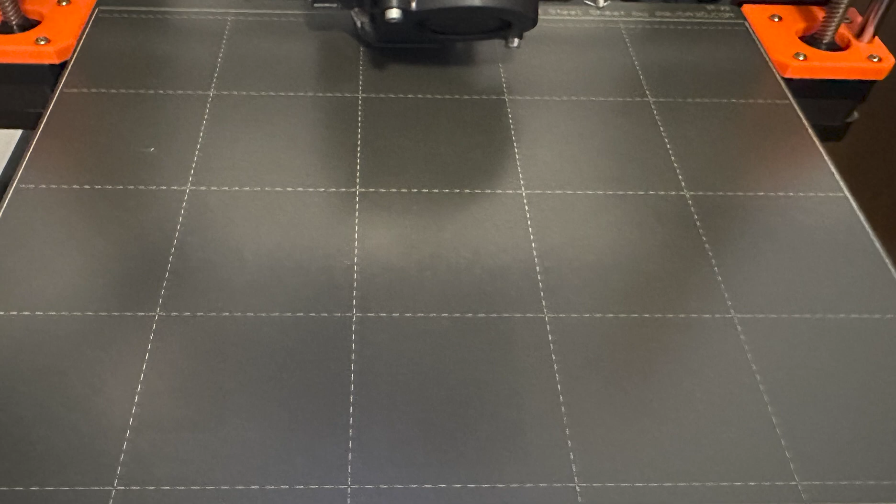Stop touching your print bed when you take prints off of it. Use a tool or something if you need to, but for right now, let's go wash that print bed. Use a little bit of warm water, dish soap, rubbing alcohol, anything like that. Get that print bed nice and clean, get those skin oils off of it.

After that, we need to make sure we're printing in the right temperatures. Let me show you how to do that. Here in Cura in the marketplace, right up here, if we come into the search bar and do a search for temp towers, you'll find this auto towers generator. Go ahead and click install.

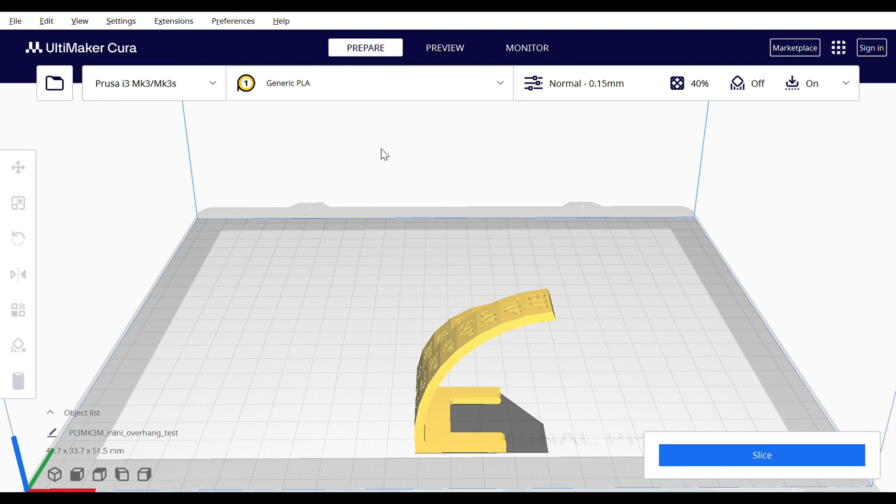Once you have that auto tower generator installed, you're going to want to click here on extensions, auto towers, and then come down to the filament you're using, ABA, ABS, PETG, PLA, whatever it is. I'm going to click on PLA right now.

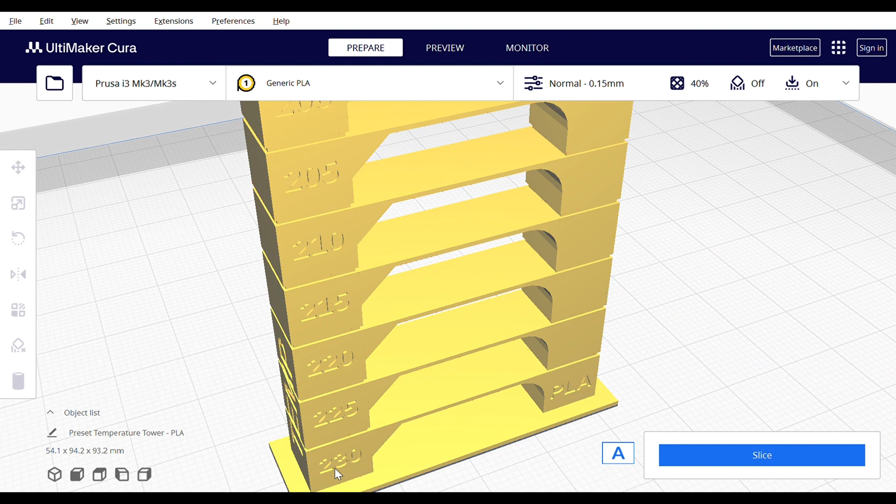It's going to add this tower in the background here to your print, which is programmed already to start at 230 degrees. It prints these recessed numbers. It prints an overhang, it prints an arch, a bridge, and then it'll lower it by 5 degrees, 225, 220, and it goes all the way up to like 180 or 185, something like that.

Your job after you print it without supports is to come in and look at each one and see which print's the best, which one has the least amount of spaghetti hanging off the bottom, where the overhangs are best, where the arches are best, where the numbers look the best.

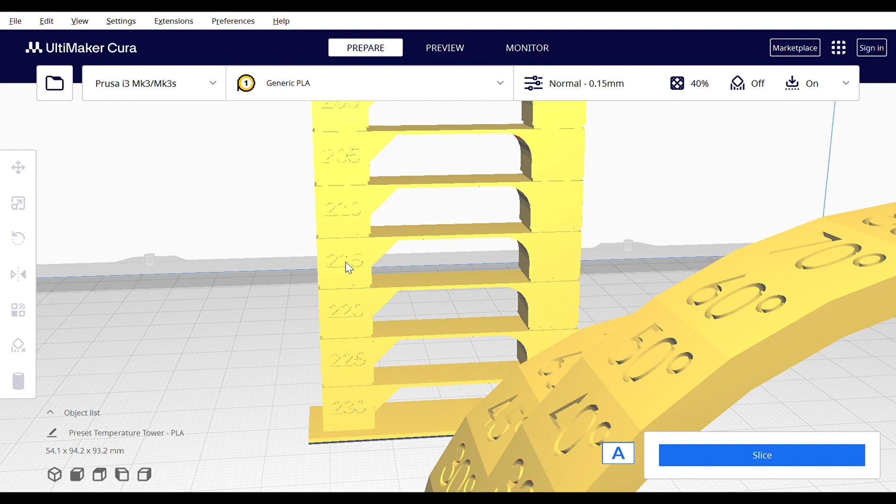You make that decision and then write this number on the side of your filament roll. That way you'll always remember that when you're using this filament, you want to do it at 220 or 215 or whatever works best for your print. After you make that decision, let me show you how to change the temperature that you're printing from.

We're going to click over here on this little downward arrow, and I like to come in here first to this hamburger menu and change this to all. Your default is probably basic. Let's go ahead and change it to all. In all, we're going to talk a couple times about materials right here.

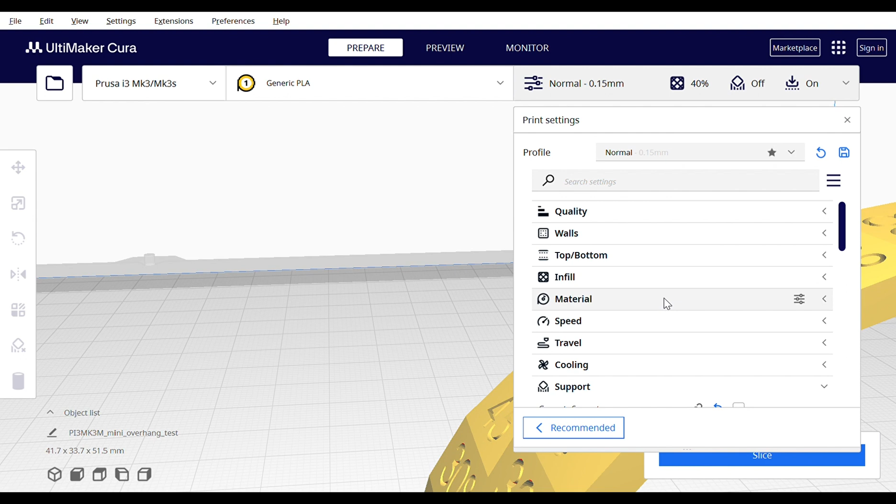In material, the first thing we want to do, this first one is probably set to 200 degrees as a default. I found that on my printer, for most of my PLAs, 220 works best, so I've been using 220. I did that with my temp tower. But use your temp towers. You come in here and decide what you think your best temperature is and use that.

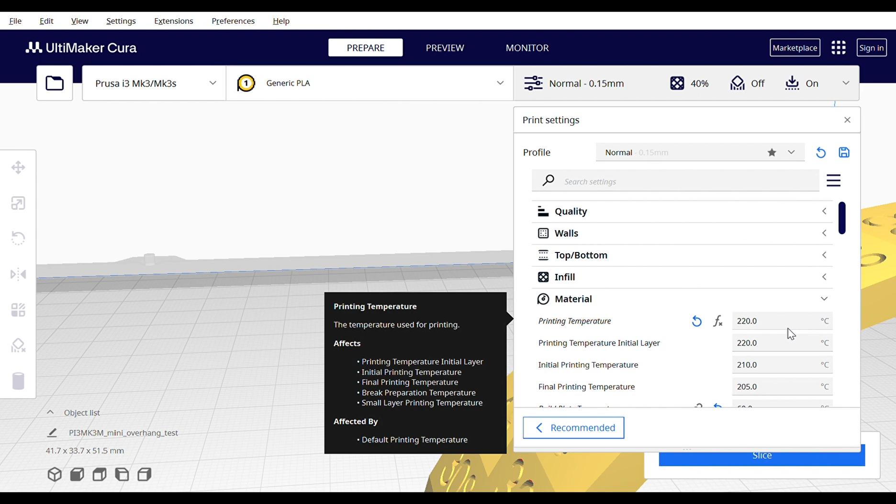Another thing here in materials we can look at to try and make sure your prints are actually holding on to the print bed better is if we scroll down a little bit and we find this build plate temperature right here. Not all printers are going to have a warm build plate, but if it does, if your default is anything under 60, I recommend moving it up to 60.

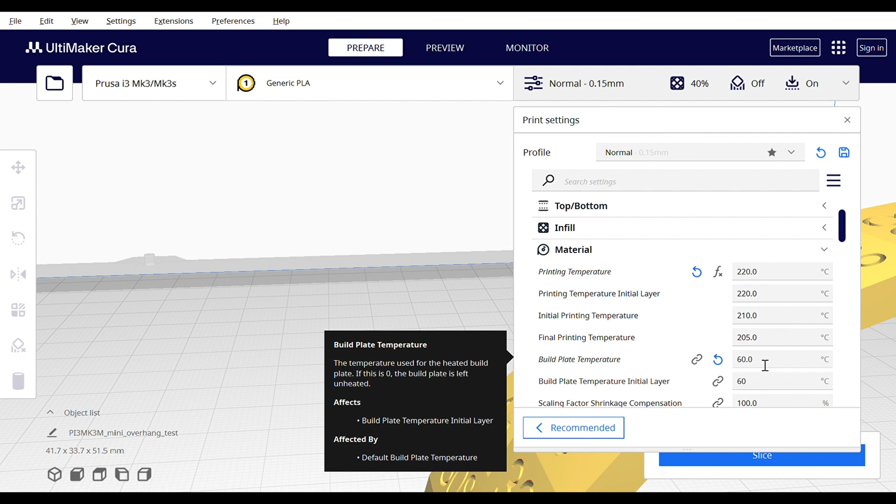60 degrees is going to help the PLA stay tacky enough to kind of grip onto the build plate a little bit better, and then you'll get a better print if it's holding onto the build plate better. So I recommend moving this up to 60 degrees Celsius.

One other thing that can affect some of your printing is the speed you're printing at. Some people see when they slice something it's going to take 10 hours and they don't want it to take 10 hours, so they come into speed and they change these speed settings. Sometimes that extruder gets moving too fast and it pulls on the print a little bit too much and it causes it to break and fail. So I wouldn't go much faster than 60.

If you think that's the problem, if you're watching your print and you see it pulling on it a little bit too much and you think you need to go slower, you can come in here and lower it down to like 50 or 40 millimeters a second.

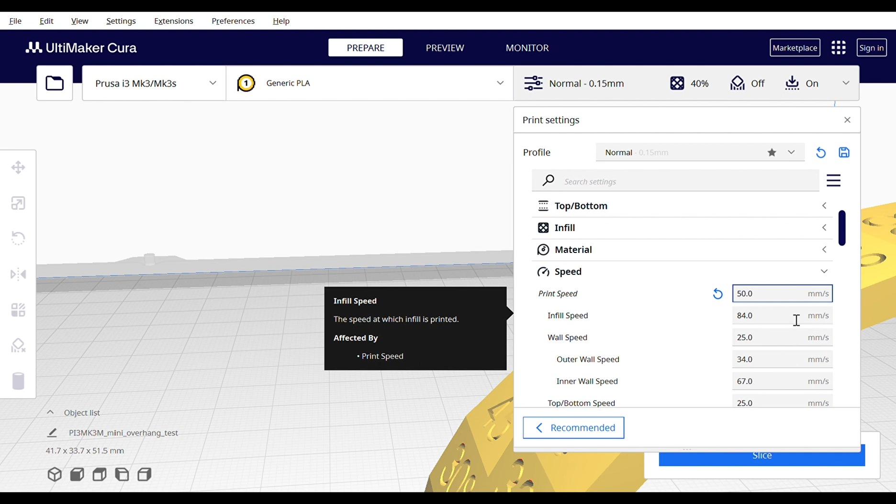Another thing that happens to a lot of prints: a lot of people don't realize they need supports in their print. This right here is a mini overhang test. I'll try and add the Thingiverse link to this to the YouTube video. This is to help me determine, if I print this without supports, which angles are best to not need supports.

After I printed this, I decided I probably didn't need supports at anything under 55 degrees. I could print slower and probably bump that up to 60 degrees. That's going to help me use less filament. It's also going to help me know when I need to use supports and when I don't.

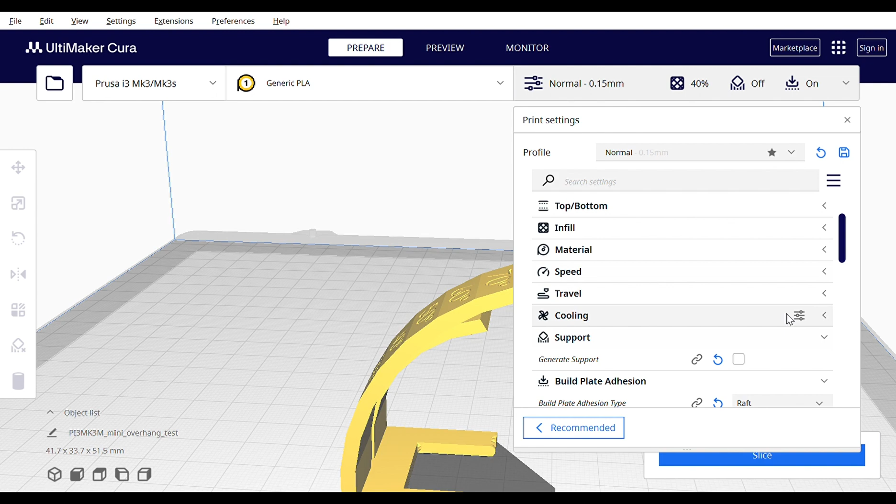But we can click here on this generate support button. The first support that's going to use is normal. Let me show you what a normal support looks like. I have to go ahead and slice it. After it's sliced, I need to click on preview to see what these look like, and I'll close these settings right here. These little accordion things right here, these are the supports.

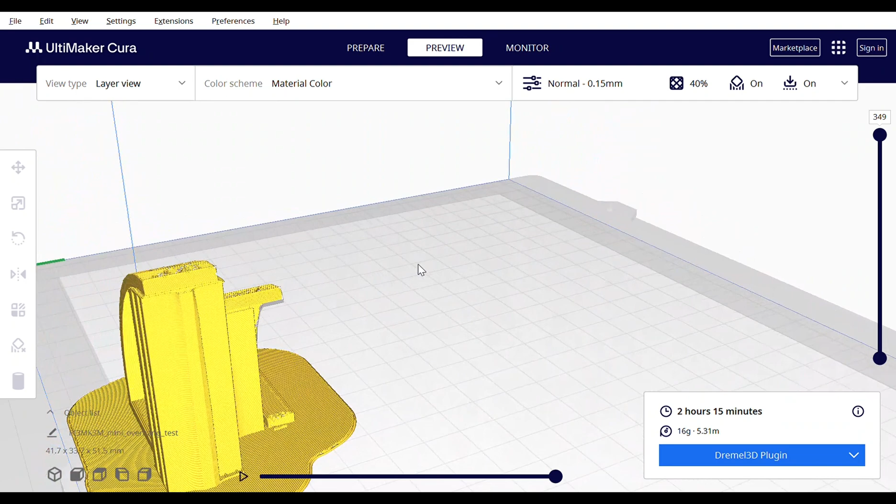You can see sometimes they sit right on the bottom of the print. They come all the way up here. These are kind of accordion normal supports. They can be difficult to remove. They can break sometimes. Sometimes you have to sand after them. But try it out, see what you think. I don't like them personally, but there are other people who do like them.

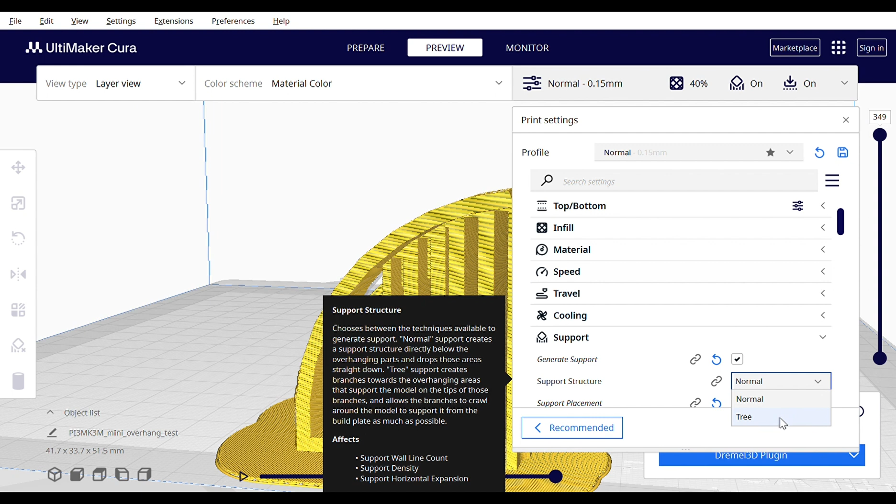Another kind of support we can use if we come in here, and you can only see this if you've turned on the all feature, maybe expert in here, but you won't see it on basic. You can come in here, and in this drop down menu we can click on tree supports, and we can use the angles right here. We can set which angle we want it to support from here, and then click slice again.

We're already in preview, and we can see here, that's what the tree supports look like. These, I feel like they use a little bit less filament, and they're a little bit easier to remove from your prints than normal supports are. So go ahead and give that a try. That should help you also.

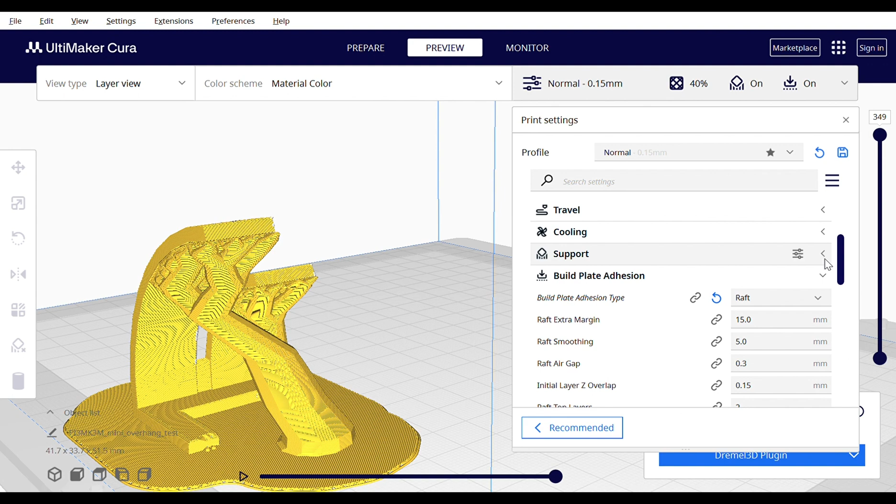The last thing I want to talk to you about is build plate adhesion, the setting right here. The default is probably a skirt, which is going to look like this little line around it. That's not going to do much except help to hold on to a little bit of heat, and radiate a little bit of heat upwards towards the print so that things stay kind of warm. It's not going to help us stick to the print.

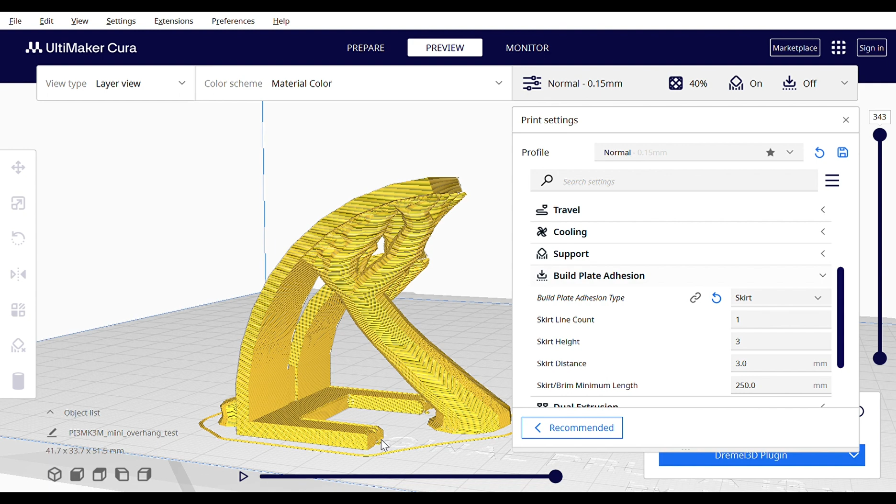This particular print that failed at the beginning of the video has a little tiny base with 90-degree angles. Those are two things that don't like to be printed. 90-degree angles tend to pull up and warp a little bit, and smaller things just don't have enough to hold on to the print bed.

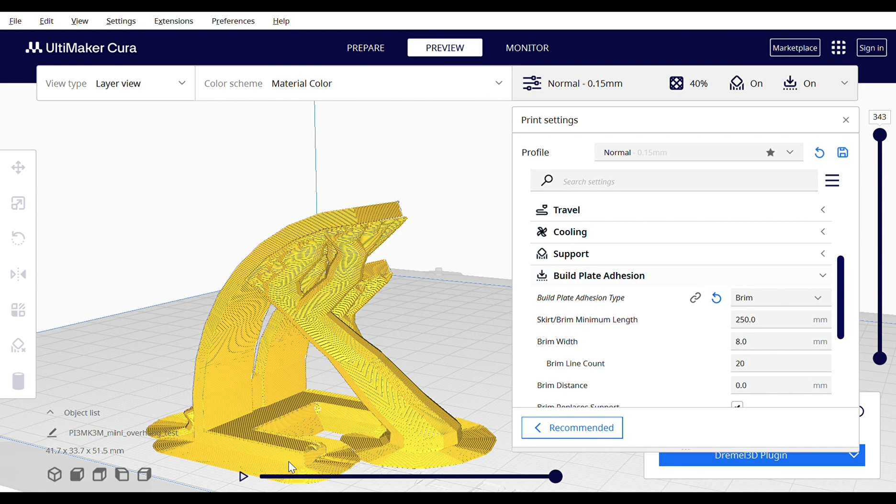So if you have 90-degree angles, you have to use probably a brim or build in some sort of mouse ear on the 90-degree corners that you can cut off later. But use at least a minimum of a brim on here to keep those 90-degree angles from warping. Brim is a single layer around the outside of the print that's there to help it hold on.

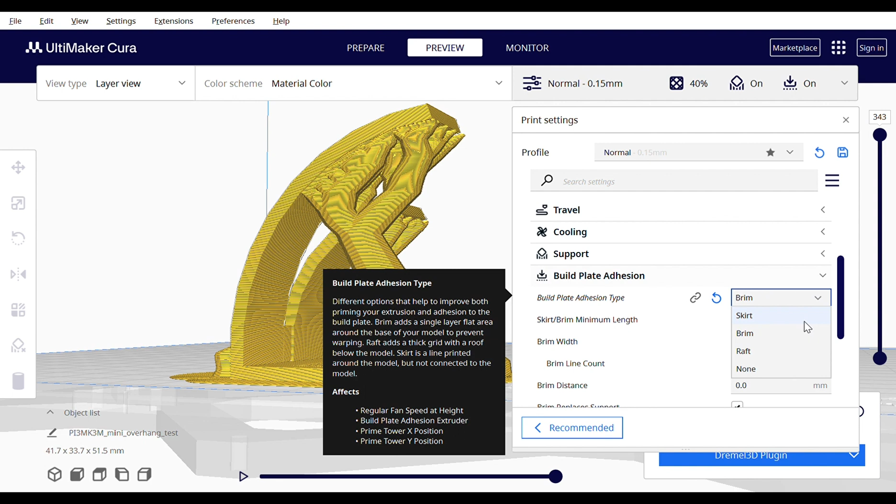Sometimes, like the print at the beginning of the video, the brim was just too little, and to make it work I actually had to come back in here and set it to print with a raft. A raft is anywhere from 2 to 4 layers, and it's a much bigger adhesion than the brim. You can see here's the raft. It is a bigger adhesion. It comes out farther away, and it will just hold on to the print a little bit better to the print bed.

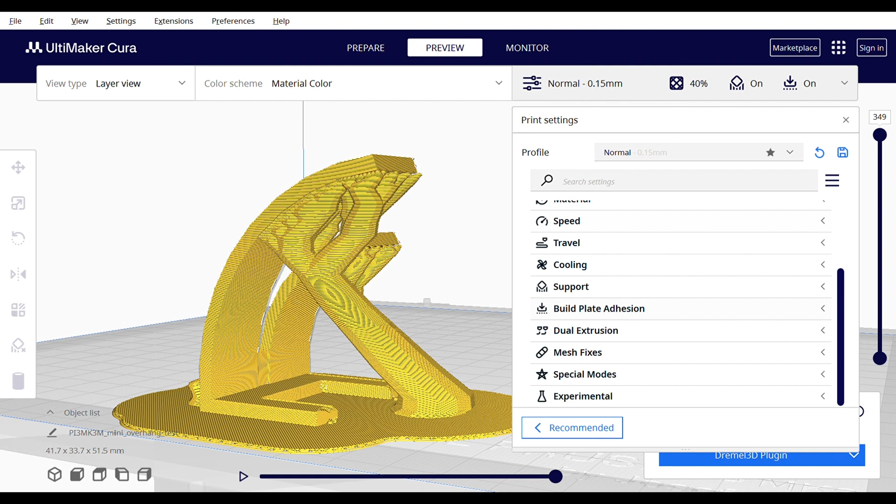Okay, so I hope those things help you. Keep your print bed clean, check your printing temperatures, check your bed temperatures, check your speeds, check your supports, and check your adhesions. If you have 90-degree angles, use at least a brim or a raft to get those 90-degree angles to work better. All right? Hope that helps. Go have fun.